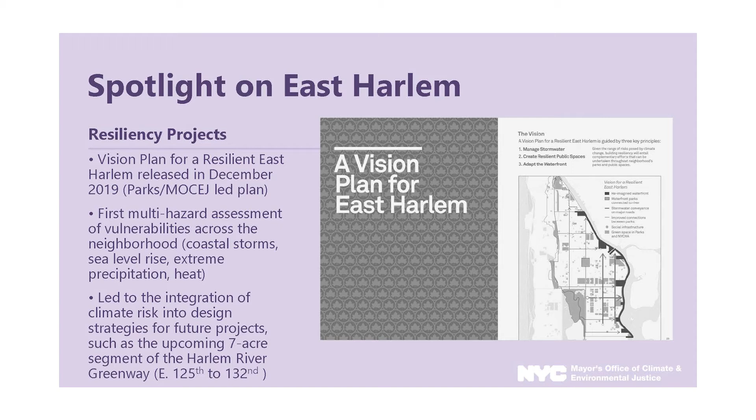This community very much dodged a bullet in terms of the worst impacts. But that said, if the storm had arrived slightly later, slightly earlier, it could have looked a little bit different. But it's not just coastal events like that. It's also heavy rain events like Ida that we all experienced very recently, and heat events.

And so we're very proud of the assessment that we did looking at multi-hazards across this community. And I think most importantly, it wasn't just a study that gathers dust somewhere, but it was immediately something that we were able to integrate into planning processes that you'll see through presentations that EDC and Parks will be giving later today.

Specifically the Harlem River Greenway and some of the upcoming projects. Another thing I wanted to highlight here, and once again we'll be going into a little bit more detail later, but a specific project that came out of that study was the cloudburst effort, relating to that Ida event, the kind of extreme rain that comes very quickly.

So one of the projects is at Clinton Houses. This is something that we were able to get a FEMA grant for during that study process. And back in the prior administration, we were able to get full funding for completion of an innovative pilot project at Clinton Houses looking at limiting the worst impacts of extreme rain.

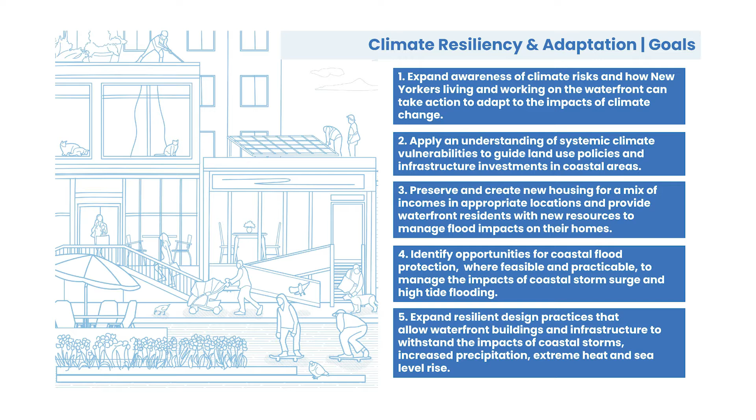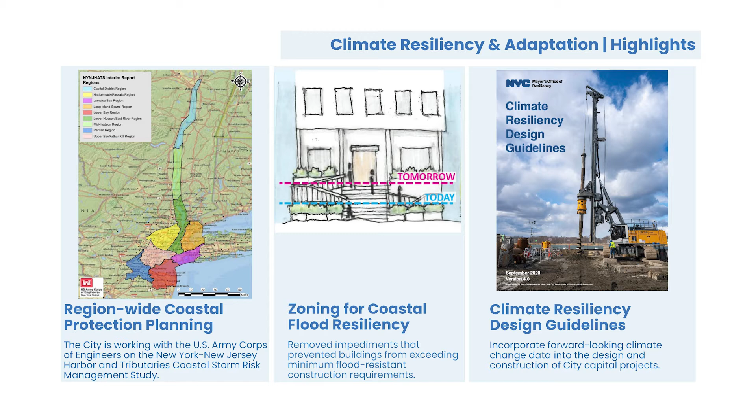Here are a few examples of how we'll do that. The city is working with the Army Corps of Engineers to advance the New York, New Jersey Harbor and Tributaries Coastal Storm Risk Management Study, which is looking at coastal protection for our entire region. The study restarted in November after a 20-month pause during which the previous federal administration declined to provide funding for this important work.

Since initiating the study, the Army Corps has identified 5 potential approaches based on elevation analyses, feasibility studies, and environmental assessments. These scenarios include a massive surge barrier between New Jersey and the Rockaway Peninsula, as well as smaller scale projects that the city has long advocated for. The Army Corps is expected to identify and conduct public outreach on one of these alternatives later this year.

In addition to advancing our coastal protection planning, the city has also taken steps to ensure that the design of buildings and infrastructure follows the best available climate science. Sandy reinforced that resilient building design can reduce our risk to severe flood events. Zoning for coastal flood resiliency, which was adopted by City Council in 2021, enables new and existing buildings to exceed minimum flood-resistant construction requirements. This will help ensure that the buildings we live in and work in can withstand flood hazards well into the future.

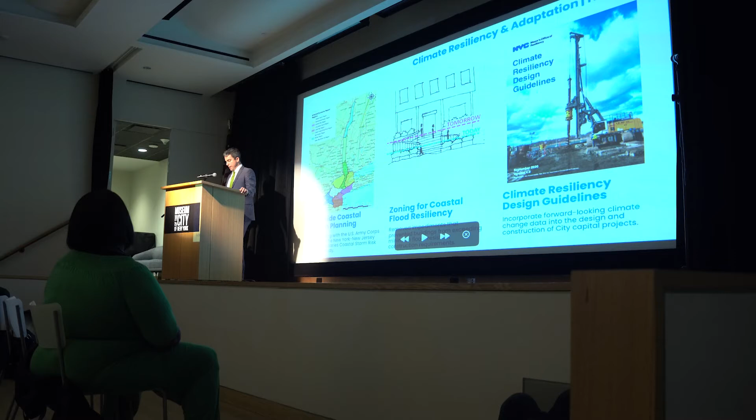Additionally, the design of the city's facilities and infrastructure will incorporate forward-looking climate change data through the Climate Resiliency Design Guidelines. These guidelines are being piloted on all types of city projects over the next few years to understand the design approaches that are most effective at managing coastal flooding, heavy rain, and high temperatures.

The next topic area is waterfront public access. The vision for waterfront public access aims to improve and expand access to open space by continuing to address inequities in access to open space and its design, acknowledging the vital role waterfront parkland plays in coastal adaptation, and redefining what waterfront access means by advancing opportunities for on-water recreation, such as kayaking.

The 4 goals for waterfront public access focus on bridging public access gaps in historically underserved and disconnected waterfront areas, promoting opportunities to get onto and into the water where appropriate, ensuring the design and programming of open spaces reflects a range of users, and promoting good stewardship of open space.

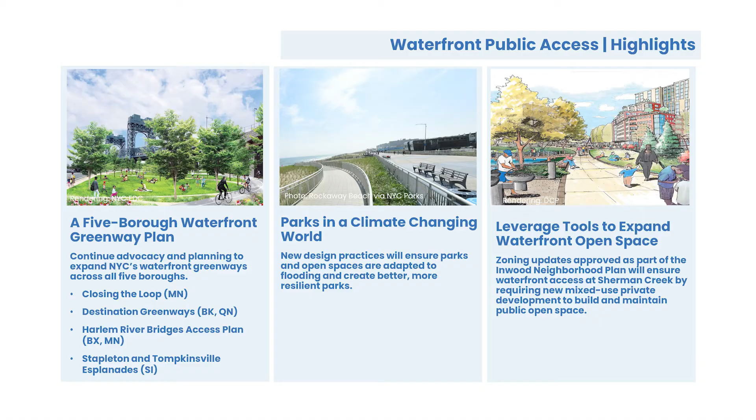Some of the projects and initiatives that would help achieve these goals include expanding New York City's waterfront greenways across all 5 boroughs, including completing the Manhattan Greenway in East Harlem, and improving conditions for pedestrians and cyclists across the Harlem River. We can also adapt design practices and the materials used to manage flooding, as well as to create better, more resilient parks, such as what the Parks Department was able to do in the reconstruction of the Rockaway Beach Boardwalk following Hurricane Sandy.

The plan also recognizes the importance of using all available tools to expand waterfront open space and improve its design. Zoning updates approved as part of the Inwood Neighborhood Plan, just to the north of Community District 11, will ensure waterfront public access at Sherman Creek by requiring new development on privately owned sites to build public open space. This will help create continuous public access along the Harlem River over time.

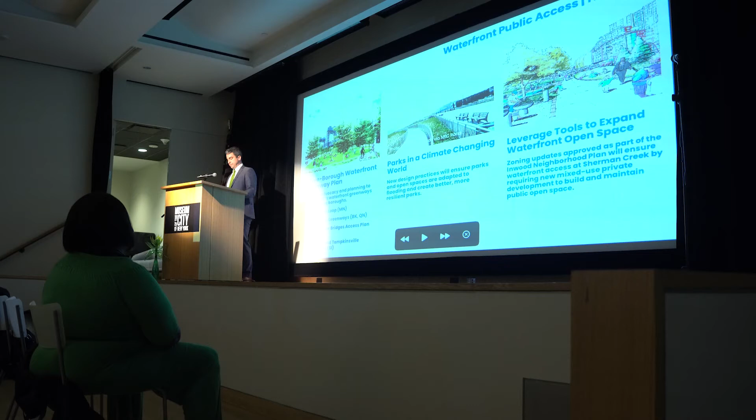The next topic area is economic opportunity. The vision for economic opportunity is to jumpstart the green economy to sustain and create a diverse mix of jobs for New Yorkers.

The goals for economic opportunity are advocating for a 21st century working waterfront, using the waterfront to diversify the city's economy and drive equitable economic recovery, connecting these investments to employment and career advancement opportunities, and promoting the use of our waterways for entertainment, hospitality, and education.

Under the Climate Leadership and Community Protection Act, New York State aims to reach 70% renewable energy by 2030 and reduce greenhouse gas emissions by 85% by 2050, putting us on the path towards carbon neutrality. This is a big deal for New York City because our expansive waterfront setting positions us to lead the way in offshore wind for the region.

The city is laying the groundwork to propel offshore wind in 3 core areas: sites and infrastructure, business and workforce development, and research and innovation.

The city will develop partnerships with communities to create well-paying jobs for disadvantaged neighborhoods historically affected by climate injustice. The plan further aims to support MWBEs and other local companies in accessing the over $70 billion in economic activity that is expected to be generated by the offshore wind industry.

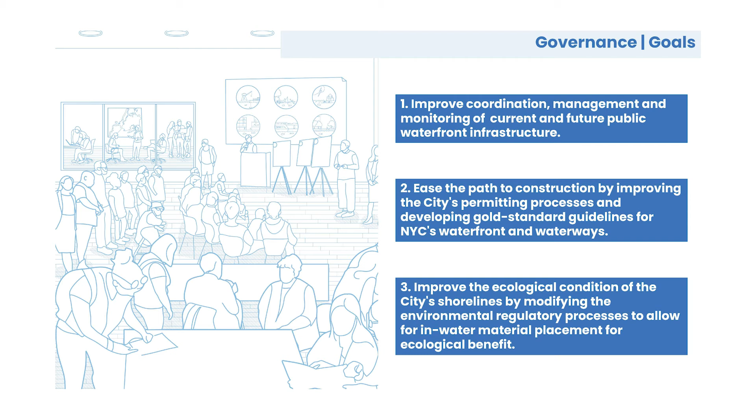The city is in the process of developing a new waterfront code to guide the design, permitting, construction, and maintenance of waterfront infrastructure. This code will ensure there is a clear and consistent set of standards for building things like piers, docks, and seawalls.

The plan also points to opportunities to promote living shorelines or other natural features along New York City's shoreline that require filling in a portion of a water body. Current regulations can encourage property owners to replace what's already at the shoreline rather than doing something more innovative. This means a property owner is more likely to replace a bulkhead that provides no ecological benefit than do something more beneficial for the environment if it takes longer to permit.

The Alley Creek project that I mentioned before was approved by the state, but it took several years to do so, and was only approved as a pilot. It includes detailed monitoring requirements to show how adding fill is improving the ecology of the site. But by collaborating with state and federal regulators on this important work, the city can encourage resiliency and promote living shorelines along New York City's mostly hardened edge.

I'll wrap up by talking about the next steps for the plan. The Waterfront team was incredibly excited to release the plan in December, but there's still much more work to do. We are now focusing our attention on promoting the plan by doing presentations just like this one and working within the Adams administration to advance the initiatives within the plan.

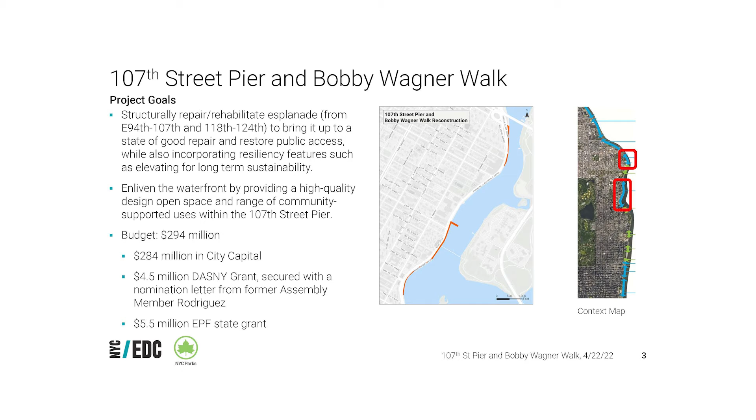The 107th Street Pier Bobby Wagner Walk project aims to structurally repair and rehabilitate the Esplanade from 94th Street to 107th Street and 118th to 124th Street, to bring it up to a state of good repair and restore public access, while also incorporating resiliency features such as elevating for long-term sustainability. Another portion of the project works to enliven the waterfront by providing a high-quality design open space with a range of community-supported uses at the 107th Street Pier.

This pier is planned to be completely demolished and rebuilt with new topside elements as a brand new open space. The pier is currently closed to the public, closed since 2018 due to structural safety concerns. The budget of the project is $294 million, with a large portion of that being city capital and a few state grants mixed in as well.

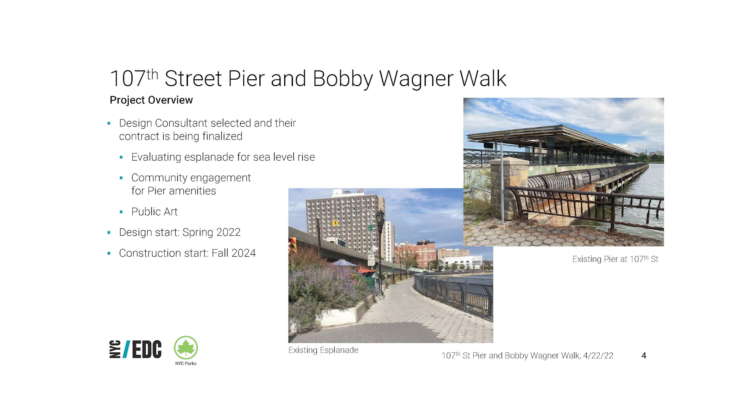We've currently selected our design consultant and we're working on finalizing their contract. The scope of the design includes building a strong, resilient Esplanade structure that absorbs the knowledge gathered from the East Harlem Resiliency study and applies it to the design in this location. There'll be modest elevation for sea level rise that will consider its impacts on inland drainage needs.

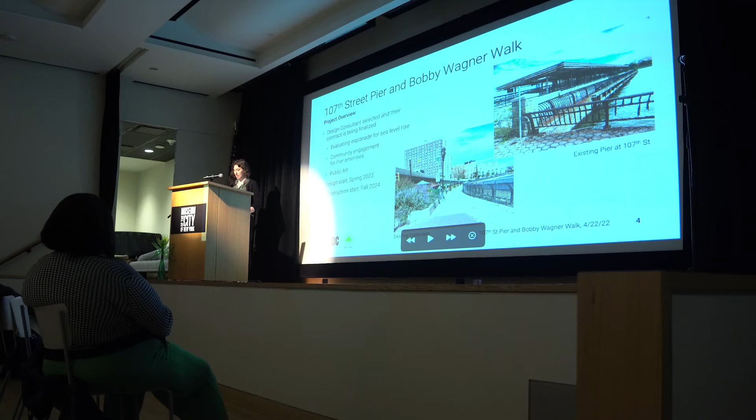The pier will also include public art, and the selection process for that artist will follow the Percent for Art process, similar to the process that was done on the Manhattan Greenway Harlem River just north of this. A selection committee will be comprised of community members, DCLA, Parks, and EDC, and an art consultant on the selected design team will do outreach to local and regional artists to determine who the call for proposals will go out to.

We are anticipating design for this project to start this spring in 2022 and construction to start in fall 2024.

Just north of 107th Street Pier, Bobby Wagner Walk, is an ongoing project, Manhattan Greenway, Harlem River. This project has been presented many times over the past few years to Community Board 11, and so today I'm just going to give a refresher on the project background and the overall scope and design of the project.

The Manhattan Greenway Harlem River is a project that's part of a larger greenway plan to close the loop around the island of Manhattan. The area between 125th Street and 132nd Street is one of the last remaining gaps in this loop. This project will provide greater access to the waterfront, safe pedestrian and bikeways, along with parks amenities.

Again, EDC is implementing this project on behalf of Parks as part of a larger project we are managing to restore structural integrity of the waterfront along almost the entirety of the east side of Manhattan along the Harlem River.

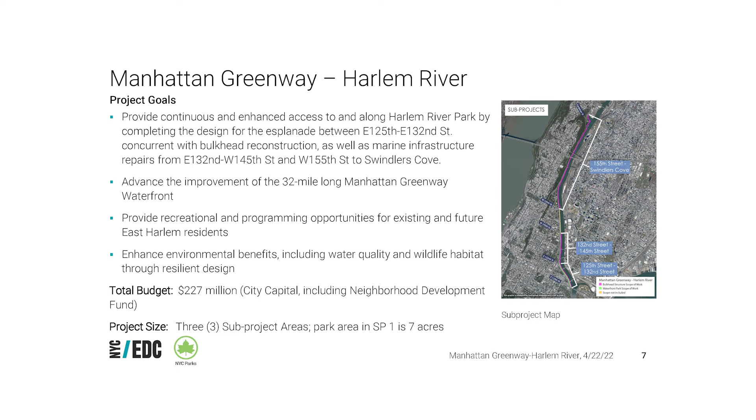You can see here we have in this map our three sub-projects identified. The southernmost is that 125th to 132nd Street area, and that's where this new 7-acre park will be located. Just north of that is sub-project 2, 132nd to 145th, where there's an existing esplanade where we'll be doing structural repairs. Similarly, from 155th to Swindler's Cove, there's an existing esplanade where we will be doing bulkhead and marine infrastructure repairs.

And the budget for this project is $227 million, funded by City Capital and including a neighborhood development fund. So today we're going to focus mostly on sub-project 1, the new park from 125th to 132nd Street.

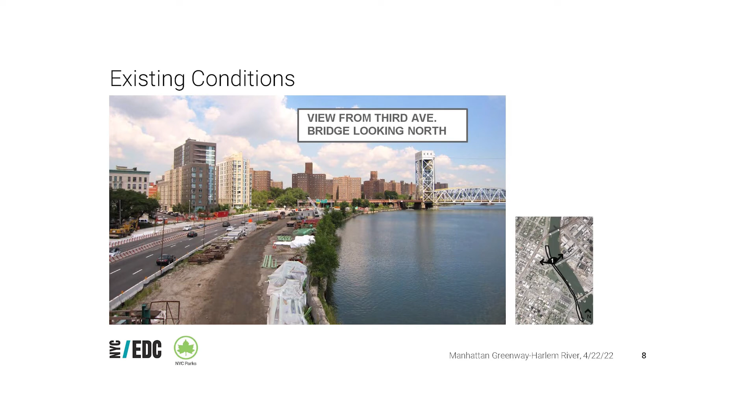Here's a view of the existing conditions on that site. You likely haven't been out here because it's been a construction staging area for City DOT and TBTA for many years. You can see it's just dirt and construction equipment. This is the view from 3rd Avenue Bridge looking north, and here is the view from underneath the RFK Triborough Bridge as it stands today.

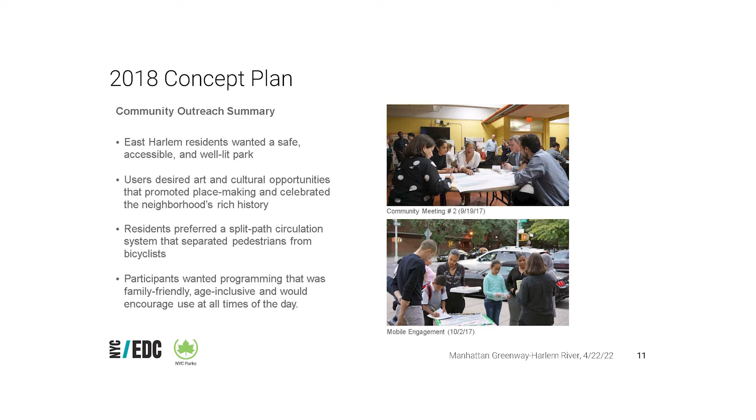This project developed from a 2018 concept plan that Parks developed, created with community input and outreach in East Harlem. Through that outreach, we heard residents wanted a safe, accessible, and well-lit park, with desired art and cultural opportunities. Popular active programming amenities included playgrounds, basketball courts, and outdoor fitness features, while desired passive recreation features included benches, game tables, and picnic areas. Shade and trees received the most votes in the vegetation category.

Moving forward into today, the 2020 design is now being managed by EDC. We have Langan Engineering as our lead engineer, with Starr Whitehouse Landscape Architects working with us to develop the design for this park. We're currently progressing final design detail drawings, so what you see today is how the design stands, but it is still in progress.

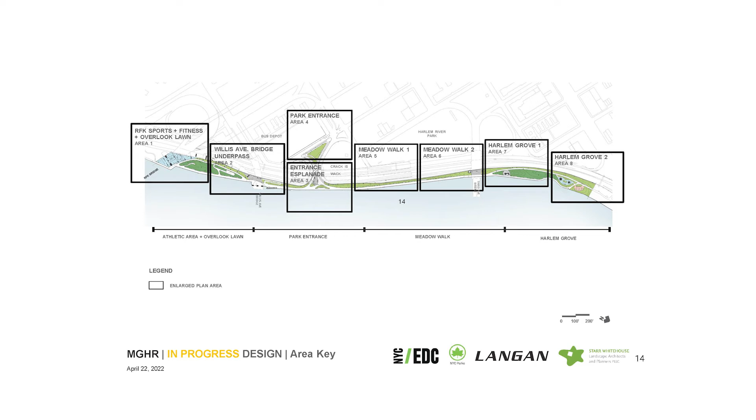Here's the overall view of the park, and we're going to go into each section to see what programmatic elements are there. This is a work in progress, and I'll give a plug for the Community Board's Open Spaces and Environment Committee - our Harlem River design team will be there on May 5th to give a more in-depth presentation and detail updates on how the design has changed since they last presented. The artist producing the public art piece for the park will also be there to present his updates.

Starting at the southern end at 125th Street, this is the area under the RFK Bridge that we saw in that existing conditions photo. Under the bridge, there'll be a variety of fitness equipment. We'll have basketball courts, exercise areas, a separated bike path along the back and the esplanade along the front, and a passive lawn area.

This project is working to raise the esplanade for sea level rise. The new esplanade elevation will be raised about 3 feet above the existing shoreline elevation, which is at about 7.5 feet, up to 10.5 feet to accommodate for sea level rise.

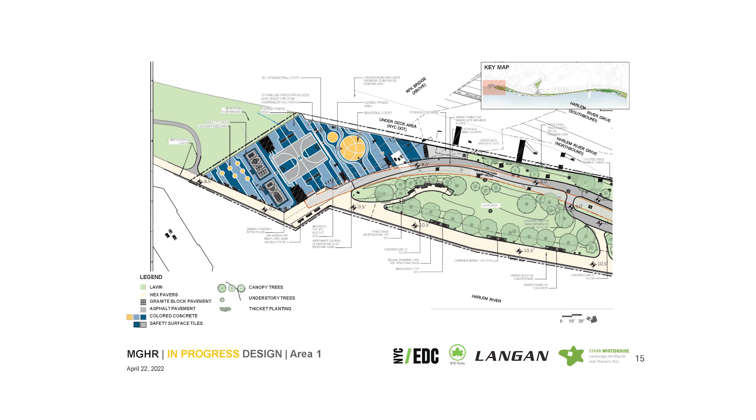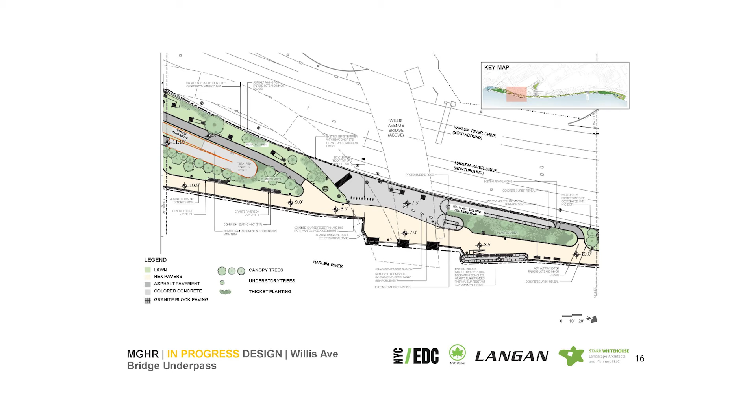Moving north from here, this portion of the Esplanade connects out to 127th Street, so this will be the main at-grade access point for the park. You can see plantings, and there are benches located here to passively take in views of the river.

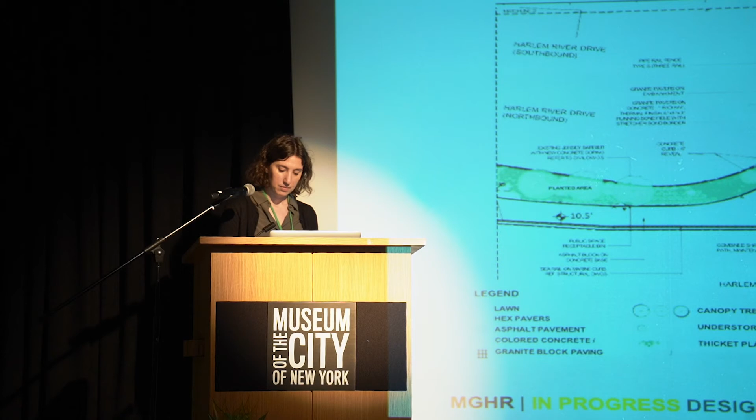Moving west, out towards 127th Street, this is an existing triangle that's going to be reworked as the entrance to the park. If you've been on this triangle before, there are no walkways - it's just planted. So in the development of this project, it will include bike and pathways that lead into the park, bike racks for people to park their bikes, and improved curbs and curb cuts for crossing.

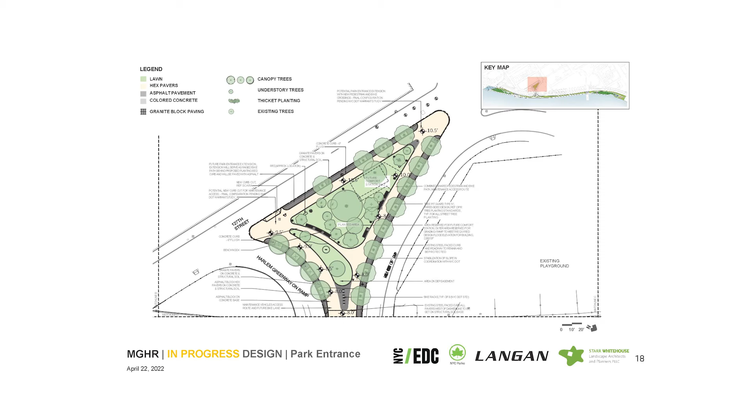We've heard from the community a large desire for a comfort station and bathroom in this park, so we're leaving a space in this entrance triangle to accommodate that in the future. The Parks Department is actively working to continue pursuing funding opportunities along with the community board and electeds to try and add a comfort station to this area of the park.

Back onto the Esplanade, moving north, this begins the Meadow Walk portion, a long, beautiful path with plantings, the raised esplanade, and passive benches. Part of the design here includes hundreds of new salt and wind-tolerant trees, shrubs, and native plants adapted to New York City's harsh shoreline conditions. We'll have hundreds of new plantings along this new Esplanade and Greenway.

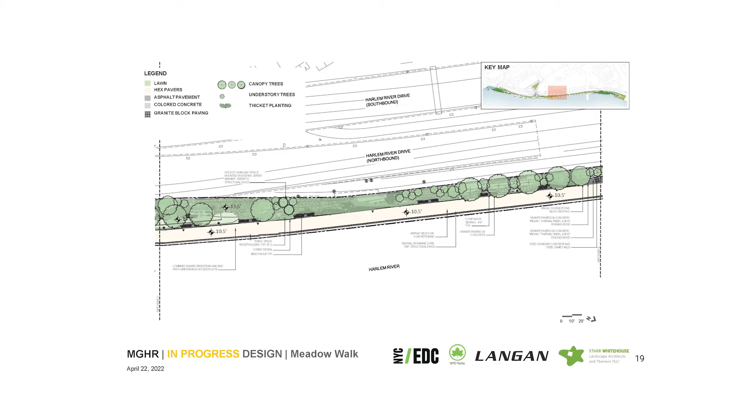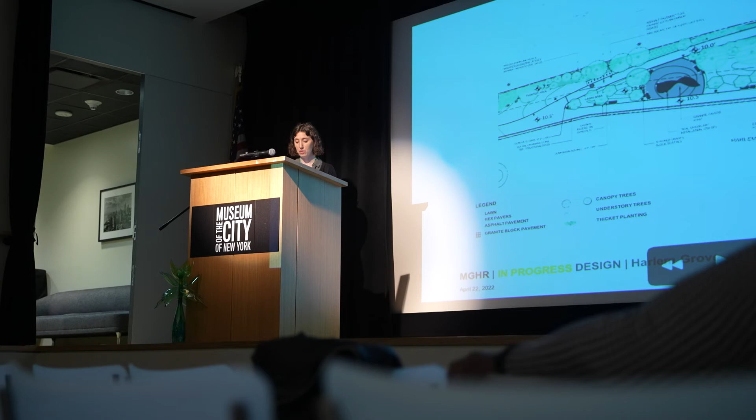The Meadow Walk continues north here with similar plantings and passive bench recreation areas. Just north of this is what we're calling the Harlem Grove area. Again, when the Esplanade gets wider, we have a separated bike path along the back of the site and the Esplanade along the water.

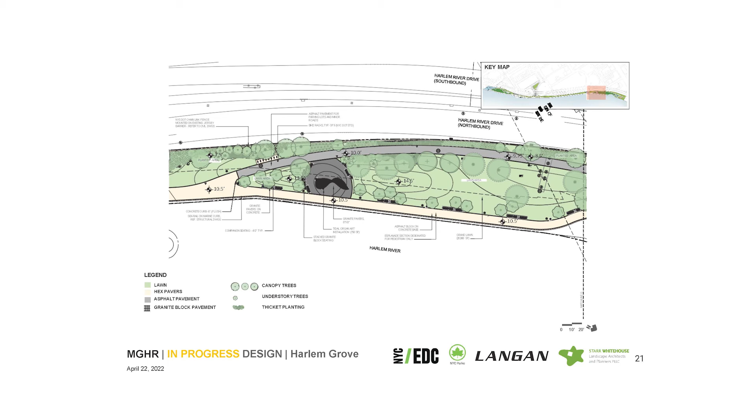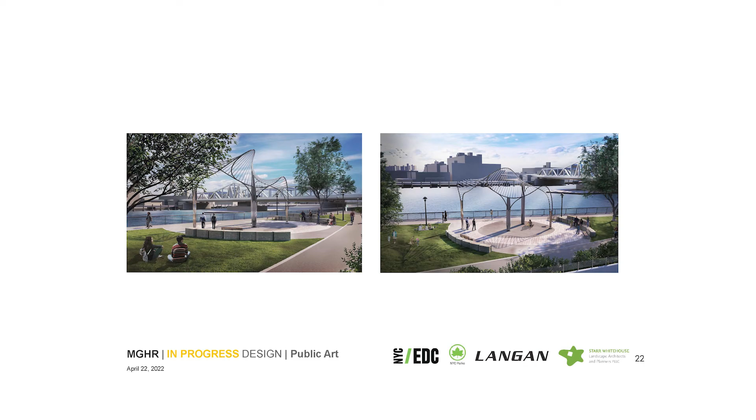We have a large passive lawn area here, and this is the site of a new public art piece as well. Here you can see some renderings of what that art piece will be. It's an original organ piece designed by Edo Adegibi.

The piece will both create a moment for observation as well as an interactive production of sound. At the very north end of the site at 132nd Street, we've maintained our separated bike path and pedestrian path and added a playground as well as a barbecue area, which has been expanded after community input. It's now 2,700 square feet and includes 6 barbecue grills. There's also a fish cleaning station.

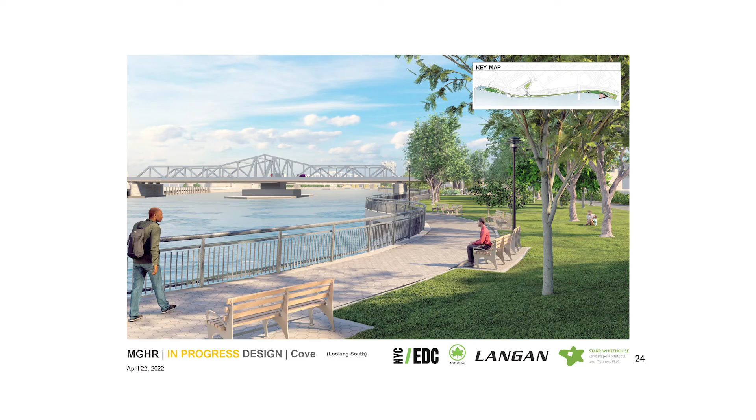We had a great design opportunity to incorporate this cove that you see on the left here. This creates additional open water and intertidal habitat as required by the New York State Department of Environmental Conservation. This added feature of the cove arose from a need to reach a net zero cut fill on the project in order to meet that New York State DEC mitigation requirement. So even for basic bulkhead reconstruction work where we're doing structural fill, we needed to get creative on finding solutions to meet the DEC requirements.

This presented a design opportunity to create a new moment within the park for expanded views of the water by creating this beautiful cove.

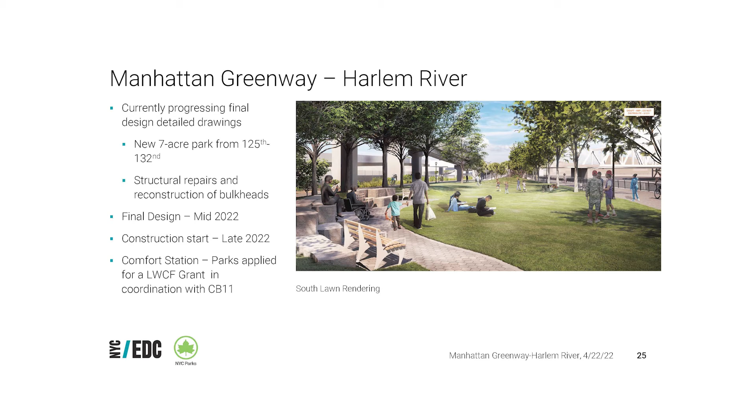In summary, for Manhattan Greenway Harlem River, we're currently progressing final detailed design drawings. There'll be a new 7-acre park from 125th to 132nd Street, and then north of that, from 132nd to 145th and 155th to Swindler's Cove, there'll be structural repairs and reconstruction of bulkheads, making them stronger and more resilient. We're expecting final design mid this year and construction to start in late 2022. Thank you.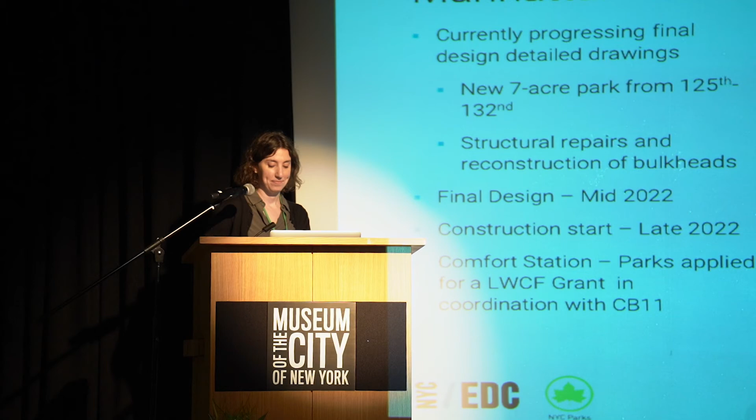Jessica's on her way.

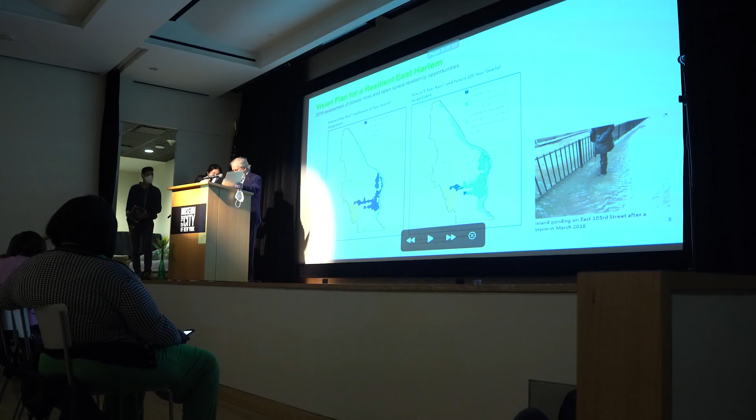Ricardo, Jana, could you come up? Are Ricardo and Jana here? Is Michelle Palmer here? Oh, that's it. Oh, great. All right, so maybe half of us are here. Two-thirds. All right, keep those fingers handy.

First of all, I want to back up the presentation just made by EDC. I don't know whether people understand how significant the addition will be, the capture that we're making of the waterfront property between 125th Street and 132nd Street, and the opportunity it provides us to expand parkland in East Harlem. It's a very significant addition to our portfolio, and the Parks Department is really looking forward to the opportunity to have what is going to be a magnificent park.

We're thankful to EDC for taking the reins and helping us with the construction, but it should be also clear that the Parks Department has been integrally involved in this process all along, and have also helped to shape the design, since we're going to have to maintain the property.

Over a period of time, we've added to our properties along the river in the Harlem River Park, a little bit further north between 132nd and 144th Street or so, in two phases. This is yet another phase in which we've expanded parkland right along the Harlem River, and this is one of the more significant additions we've had in a long time. So thank you to EDC, and thank you to CB11 for pushing us in that direction.

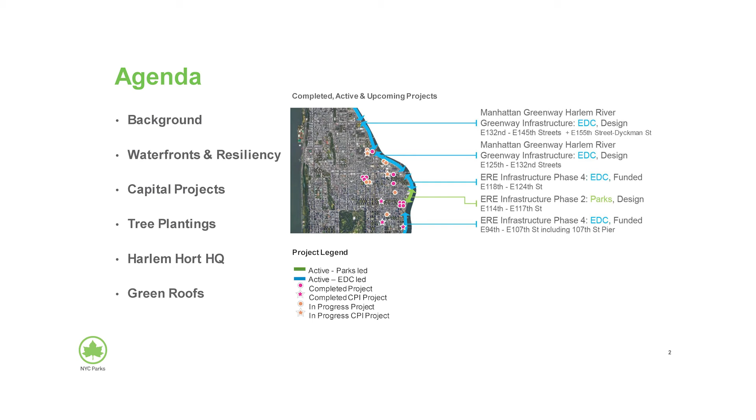Thank you, Steve. My name is Alda. I'm in the Planning Division of New York City Parks. I wanted to touch on what this diagram shows. We mapped out the upcoming and recently completed waterfront projects, shown as arrows along the waterfront, as well as recently completed and in-progress projects. The pink shows completed capital projects, the orange shows in-progress projects, and we've starred the Community Parks Initiative projects, which Steve mentioned are our centerpiece equity projects that Ricardo will go into a little more detail.

In the Planning Division, we do a lot of work thinking about the long-term future of our open spaces and parks. One of the things we think a lot about is climate change and resiliency. As my colleagues from the mayor's office and Jessica had mentioned previously, in 2019 we partnered with the mayor's office to do a vision plan for a resilient East Harlem.

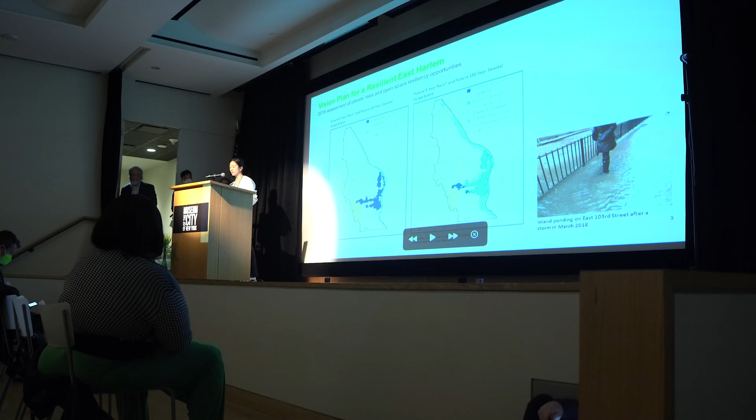Part of that vision plan process was looking at the future climate risks of the neighborhood. We mapped and analyzed what those future climate risks would look like within the neighborhood. As Jessica mentioned, what we saw was a lot of flood risk, both from coastal storms and sea level rise, as well as from rain events, water coming from the sky. A lot of that has to do with the nature of the waterways and wetlands that used to be in this neighborhood. That's something we took into account along with community input as we put together this vision plan.

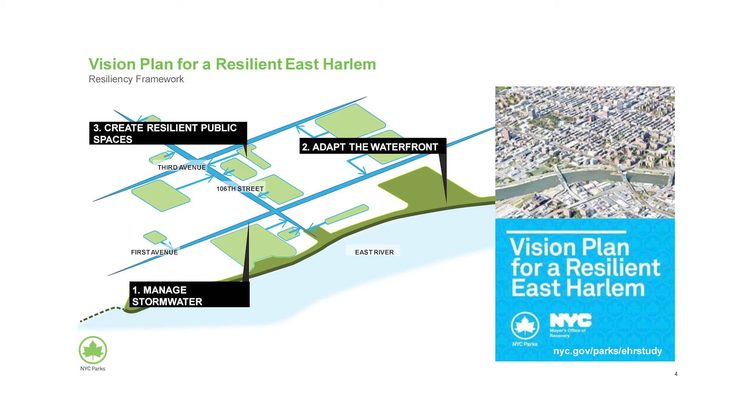The vision plan includes 3 main recommendations. The first is that we really need to manage the stormwater that will collect in the low-lying areas within the neighborhood. The second is that we really need to adapt and elevate the waterfront. And the third is that we need to be thinking about how to create resilient public spaces. As a Parks Department, we think a lot about how our playgrounds and parks can play this role.

If you want more information, we're not going to go through all of it today. You can check out the plan online. It's nyc.gov/parks/ehrstudy.

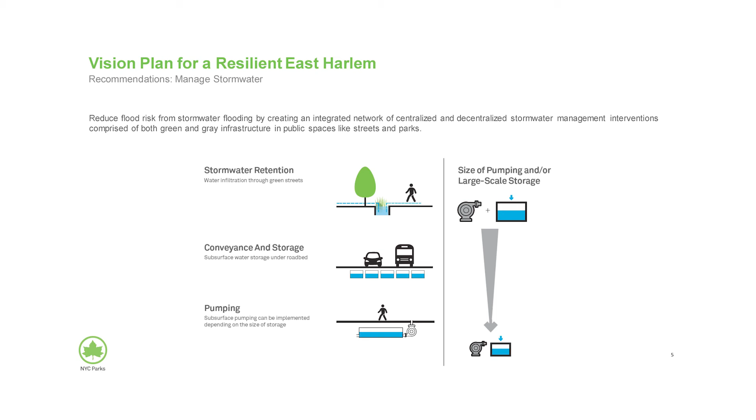Some of the things that came out of that plan and recommendation were, as we mentioned, the need to manage stormwater, really looking at a range of both green and gray infrastructure improvements in all types of sites, given the level of risks we're seeing in the future. Some of that is stormwater retention, some of that is larger conveyance and storage.

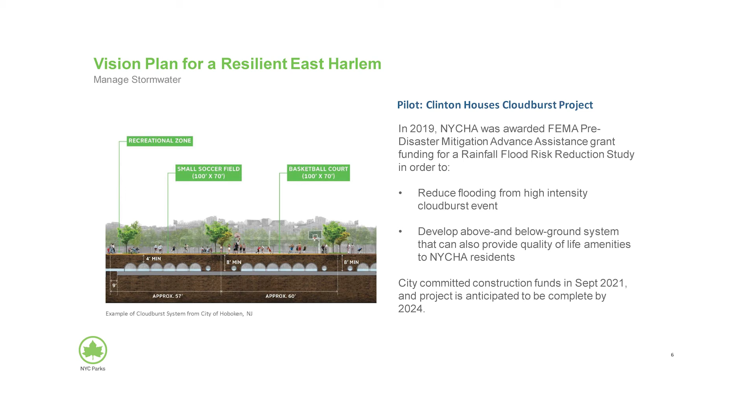As Jordan mentioned previously, one of the direct outcomes of this study is that the city was able to focus and seek funding to first study and now implement a cloudburst, or extreme rain, project within the NYCHA Clinton Houses. This isn't parkland, but I think this is something we're really looking forward to as something that could be potentially implemented in future parks.

It's also a moment to plug our Community Parks Initiative program, of which there are 3 completed sites in East Harlem and 2 that are currently in design. This is really a way in which we are transforming park spaces that may have a lot of blacktop, are not very absorbent to rain, and may be a little hotter because of materials, making sure that we partner with the Department of Environmental Protection to include rainwater absorption.

Playground 103, which Ricardo will show some more pictures of later, is one where we are able to capture 1.7 million gallons of stormwater. We're also using materials that make it a little cooler, making it a place where people of all ages can come and enjoy a cool spot in the summer and in all seasons.

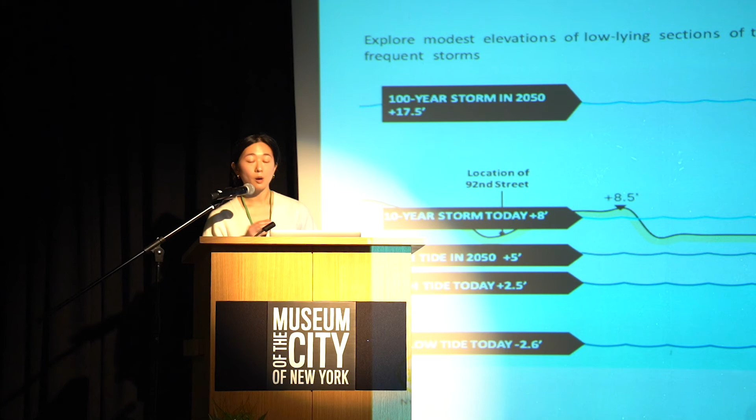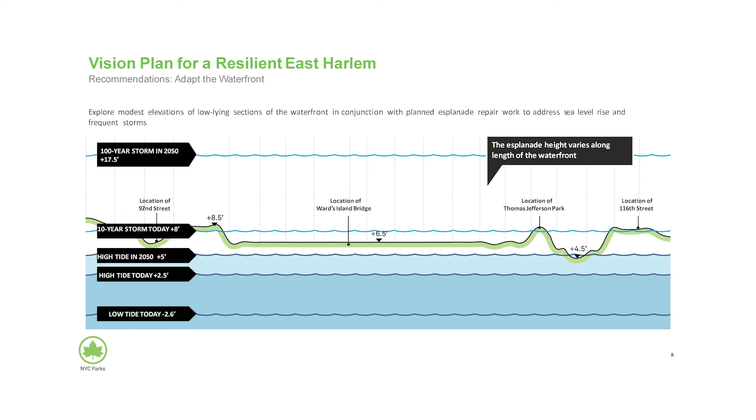From a waterfront perspective, the study also looked at the elevations of the waterfront esplanade, and one of the things we recommended was really looking at the waterfront elevations as we improve and restore our waterfront esplanades. This is something that's really informing how we're designing our future waterfront open spaces.

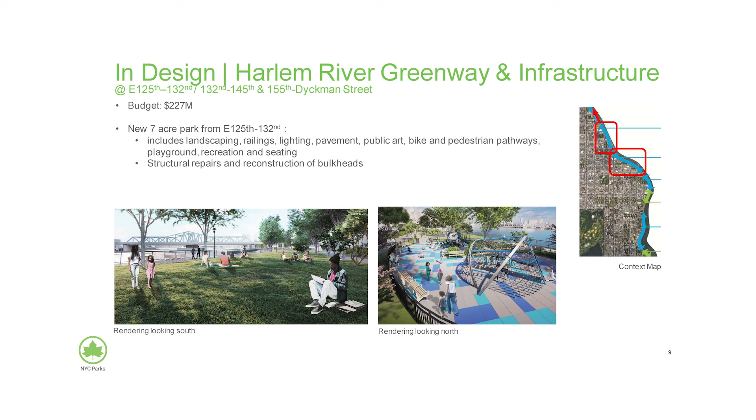So as Meredith talked about, the future Harlem River Greenway, particularly the segment between 125th to 132nd Street, which is that new 7-acre park, we are incorporating elevations there to accommodate sea level rise and future storms. It's also going to inform the 107th Street Pier and East River Esplanade Phase 4 project, which Meredith spoke about, but my colleague Mary here will also touch on briefly.

Hello everybody, I'm Mary Ely from Parks Planning. I'll be working on the reconstruction of Pier 107 Bobby Wagner Walk along with Meredith at EDC. As Meredith mentioned, the project includes a few components, including to repair and rehabilitate the East River Esplanade, incorporate long-term resiliency goals such as managing sea level rise, design and reconstruct Pier 107, and improve the waterfront with pier amenities and public art.

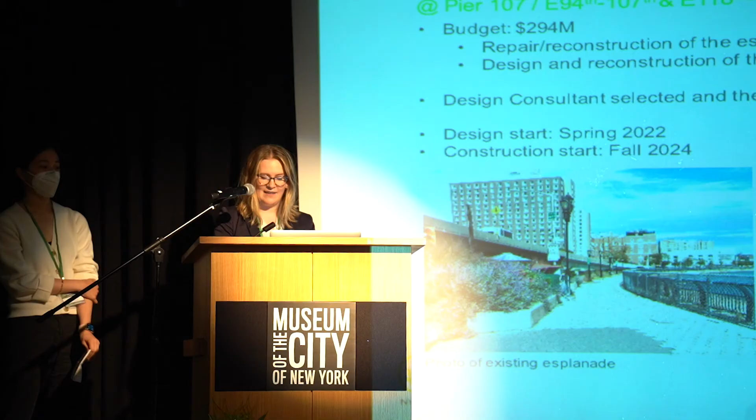The budget for this project is $294 million, and that includes some city money and state grant money as well. As for the timeline, design is expected to start this spring once a design consultant is finalized, and construction is expected to start in the fall of 2024. Passing it back to Alda, who will cover ERE phases 1 and 2.

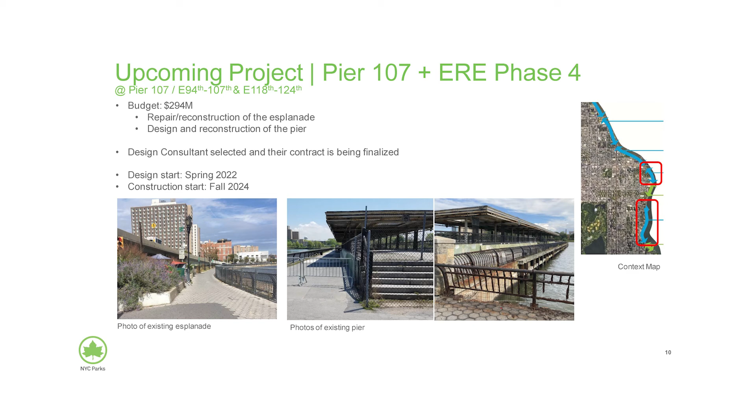Thank you. Great. So just wrapping up our waterfront updates, I think I would be remiss if I didn't mention the work that Parks is doing to rehabilitate the East River Esplanade and plan and build it for future risks.

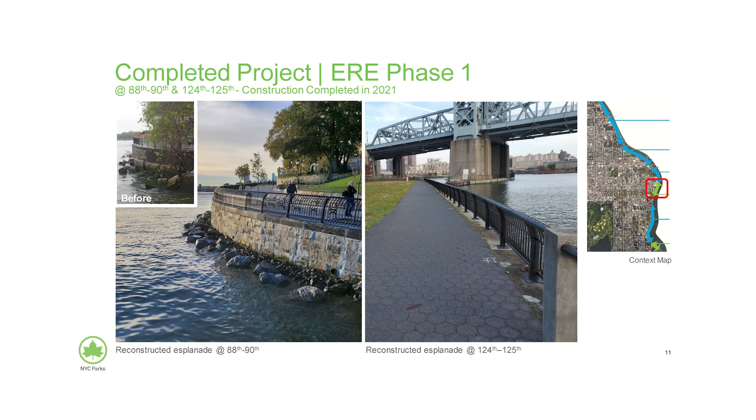So we have recently completed the first phase of the East River Esplanade. That was a segment from 88th to 90th Street and 124th to 125th Street. That was completed last year.

And we are also currently working on the permits for the second phase of the East River Esplanade. That's 114th Street to 117th Street. I think for folks who have been following this project, the update is that we've been waiting on permits from the Army Corps of Engineers for about a year now. So unfortunately, there have been delays, but we are looking forward to being able to implement this project once we get those permits in hand.

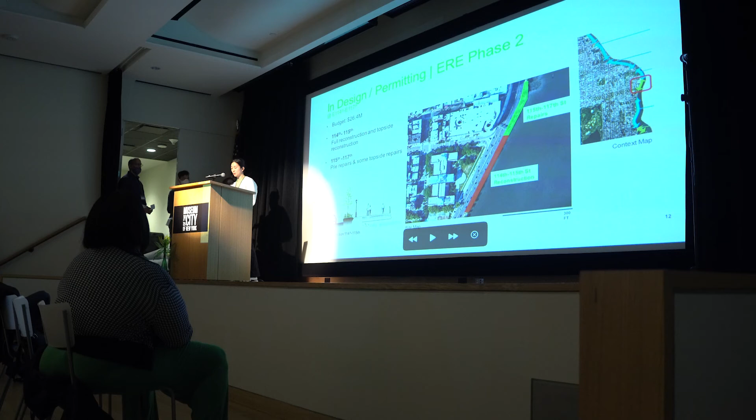It will reconstruct the waterfront, include more resilient materials, new seating, new plantings, and we're hoping that we get those permits soon. I'm going to pass this to Ricardo, who is our Deputy Director of Landscape Architecture or Design, to talk about our capital projects.

Thank you, Alda. Hi, good morning, everybody. My name is Ricardo Hinkle. I am Deputy Director of Landscape Architecture for the Manhattan team at Parks. I've been at Parks for 28 years. I'm going to describe 9 community board, 11 playgrounds, and the sustainability strategies that we have used. We can start, hold on.

Some of our most basic strategies that are repeated in all of our projects include heat mitigation, which can mean anything from planting more trees or preserving existing trees, because there's nothing better to cut the heat than a good shade tree. And what we call light-colored, high albedo pavements. Lighter-colored pavements, it turns out, reflect more sun and don't absorb the heat as much, so they tend to be cooler.

We also manage stormwater in our parks, and stormwater management usually means retaining water or detaining water on site, either in a vault underneath a play area or in plant beds or rain gardens. By cutting down on the amount of stormwater that actually goes into the storm sewer system, we cut down on the amount of pollution that goes into the rivers, because during heavy rain events, if stormwater replaces sanitary water going into the rivers and estuaries, that causes a lot of water pollution.

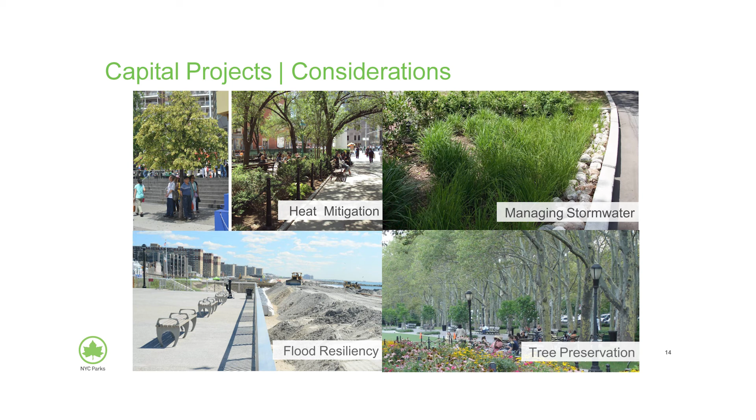We also are protecting our shorelines from sea level rise and also from wave action. And again, tree preservation. I call tree preservation sort of the Holy Trinity of sustainability and resilience, because you get the heat mitigation, you cut down on the heat, you have a lot of stormwater percolation, a lot of stormwater storage, and it absorbs carbon. So that's why we call it the Holy Trinity. It does a lot of work for us.

I just made the Holy Trinity thing up, but as a rhetorical device. The first playground we're going to visit is James Weldon Johnson.

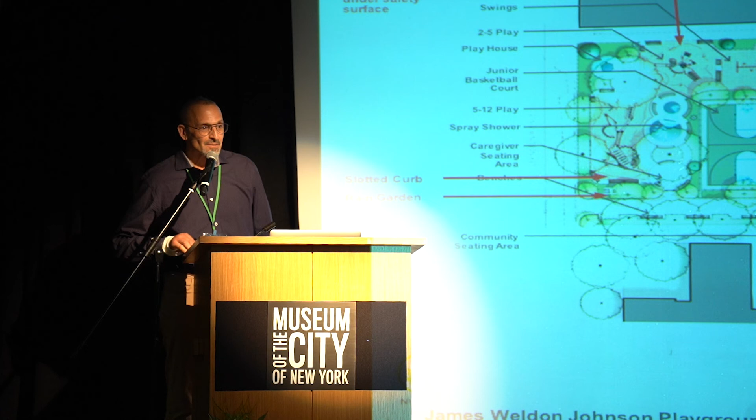It's around 114th and 115th Street on Lexington Avenue. One of the major sustainability features was a stormwater retention system under the basketball court, shown as that big orange square on the right side of the playground.

Other sustainability features include porous asphalt - asphalt with enough pores that stormwater can percolate like a sponge, and it's very effective. We're doing that under all of the safety surface and all of the play areas.

In addition, we're doing regular rain gardens. There's a difference between a plant bed and a rain garden - a rain garden is usually depressed so the water can collect, giving us more runoff retention.

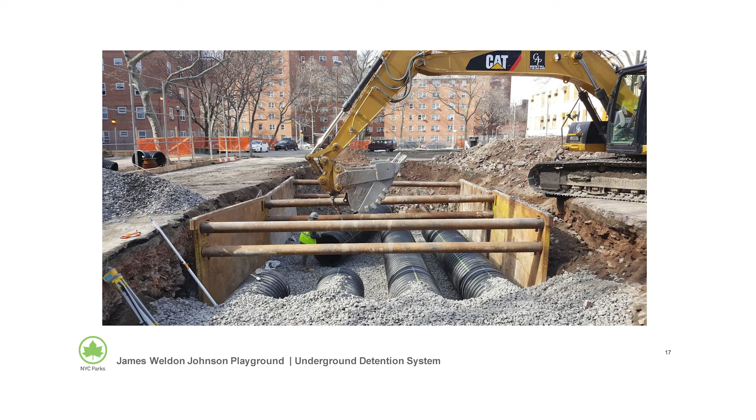Our second project is Abraham Lincoln Playground, at the corner of 135th and 5th Avenue. It recently was completed - we had a ribbon cutting, I think last October, and it's been very popular.

Some of the sustainability site work features include, again, the protection of existing shade trees, since there are a lot of shade trees on this site. We used light-colored pavements in the plaza areas with high albedo that reflects the sun.

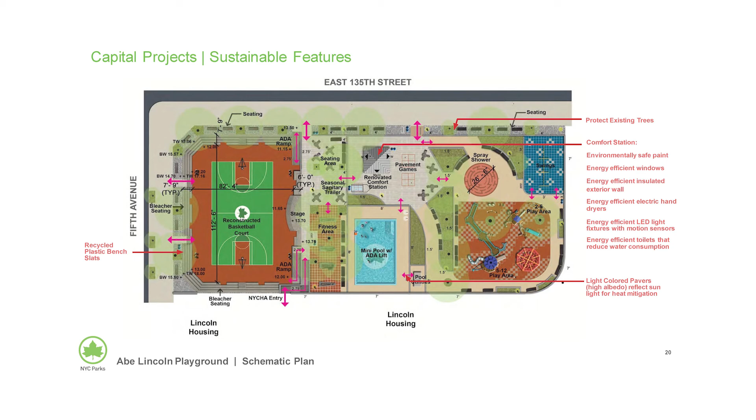In the building, there's a comfort station with insulated walls, insulated windows, low energy use dryers, and low water and energy use toilets and sinks.

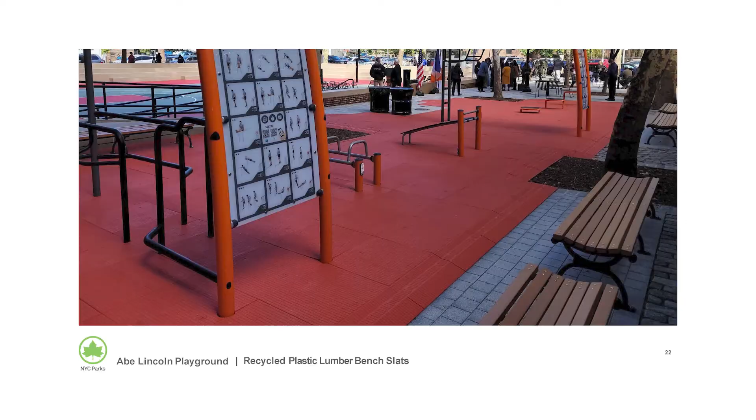This picture shows that in a lot of our park benches, we've stopped using wood and we're now using recycled plastic lumber. It's not only more durable, but it's a reclaiming use of recycled plastic.

The next playground is Playground 103, around 103rd Street and the FDR. One of its features is that it's a very low-lying playground, and during Hurricane Sandy it was inundated with several feet of water.

So one of the things we proposed was to create a lot of percolation space for the water. It was a very heavily paved playground, and we've made a lot of plant beds, rain gardens, and the like to help store water during heavy storm events. There were also a lot of trees that we protected.

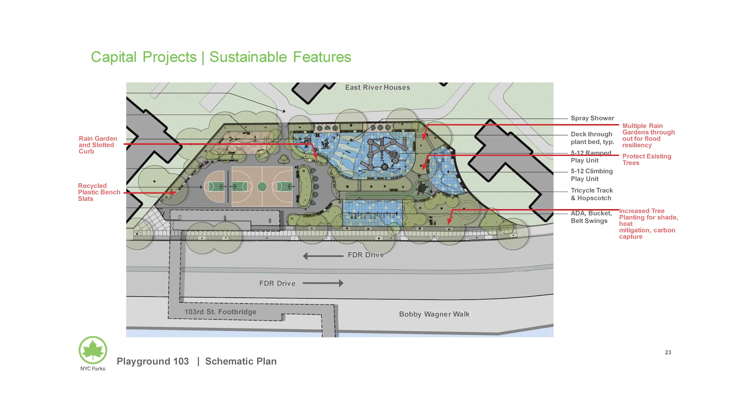Here's a picture of the park, and another picture of the park. Here's a picture showing a lot of the extensive planting we included to make it greener and to percolate the stormwater more effectively.

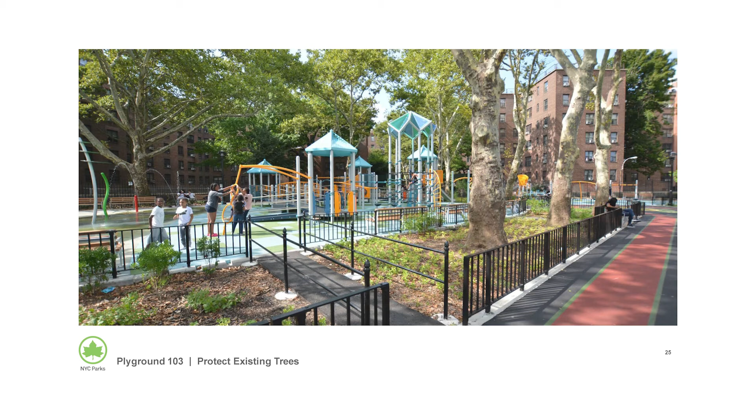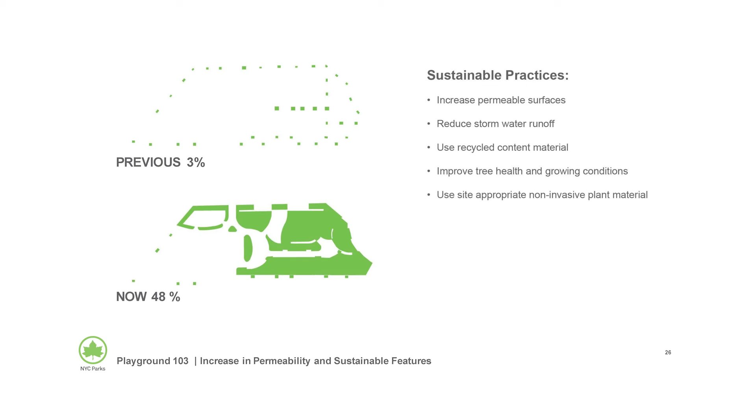This shows that it used to be only 3% permeable, which is very low, and we bumped it up - now it's 48%, which is a huge jump. That's a 16-fold increase.

Here's a picture of a rain garden, and the next park is White Park, located between 105th and 106th Street, between Lexington and 3rd Avenue, I believe.

The resiliency features at White Park include preservation of the large existing trees - you can see there are a lot of large trees - planting of new trees as well, and the use of light-colored pavements that are cooler than darker colors.

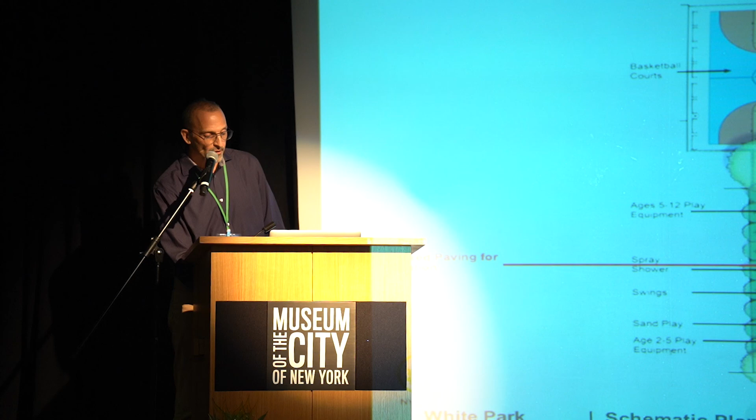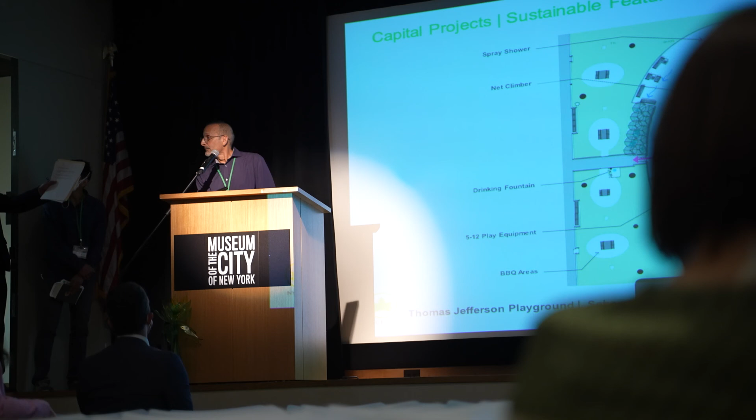The next park is Thomas Jefferson Playground, which is within the bigger Thomas Jefferson Park along 1st Avenue, just south of 114th Street.

The sustainability features here are the preservation of existing trees and the incorporation of 3 rain gardens, including one in the middle of the oval. The oval shape was actually inspired by the location of the trees so that we would avoid impacting them as best as possible.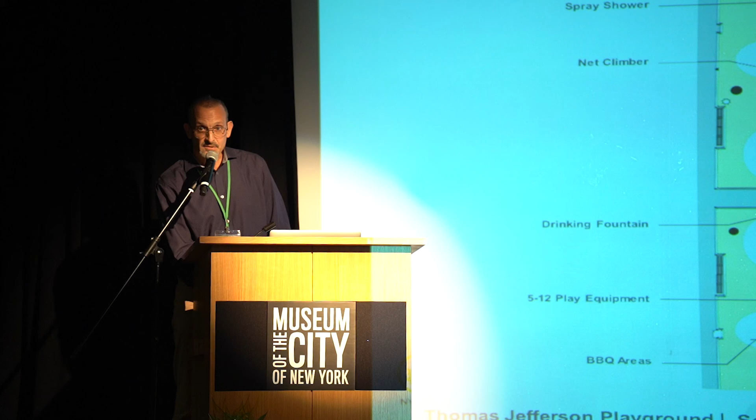Here's a picture of Thomas Jefferson Playground. The landscape architect wanted to use colors that would evoke the London plane trees in the spring, so there's the light-colored arch structures that were supposed to look like the lighter color of the London plane tree bark, which is very distinctive.

And then this is another project, Randall's Island. The Randall's Island living shoreline was built for flood resilience, sea level rise, and phytoremediation to clean contaminated soil.

I think you heard a little bit about phytoremediation. That's when the plant processes the heavy metals and other contaminants in the soil and brings it into the plant material, but takes it out of the soil. So you have to dispose of the plant, but your soil has cleaned. That's one strategy for cleaning contaminated sites.

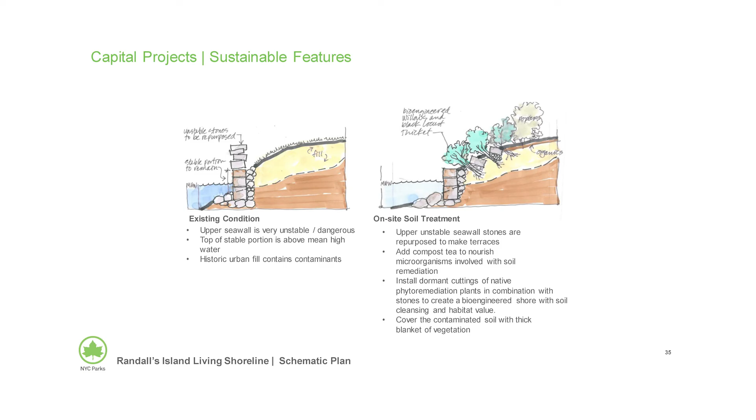At Randall's Island, we took an existing shoreline and cut it down a little bit, and made it a little more natural, a little more eco-friendly. These are fascines, or cuttings of native plants like willow, that are put in the soil, and then they tend to thrive and hold the soil in place, creating an erosion and wave-resistant shoreline edge—not for heavy waves, but light waves.

The coastal edge would be planted with native shrubs that would have the opportunity to adjust and migrate as the sea level rose.

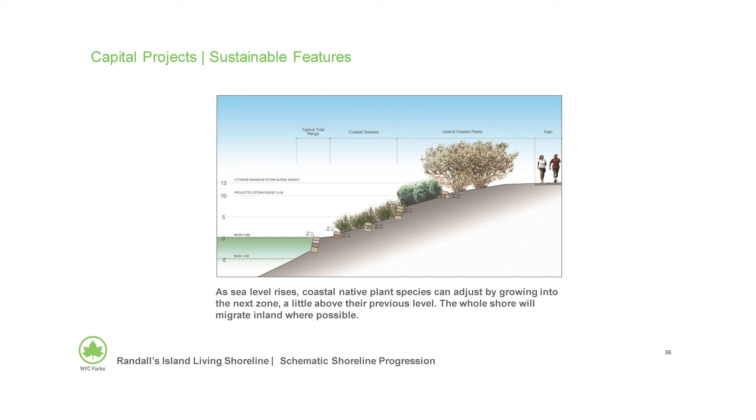This is Poor Richard's Playground, at 3rd Avenue and 108th Street. This is another playground where there are a lot of existing trees, and we've done everything we can to preserve the trees and keep them healthy.

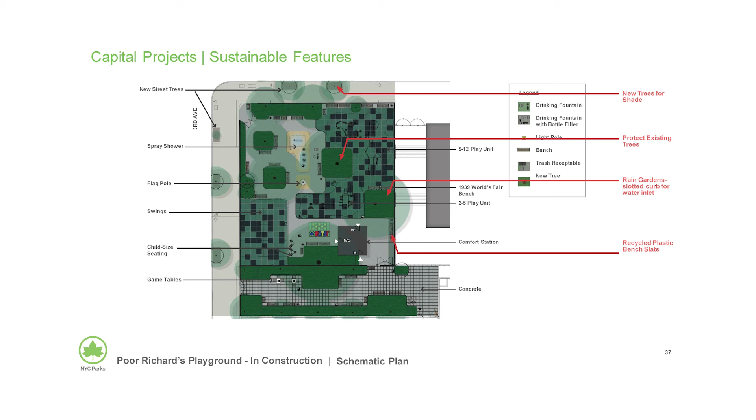One of the things we do a lot at Parks, and we've really perfected, is tree planting and protection strategies that make sure our large trees don't die a few years after construction. We've found that if there's too much impact too close to the critical roots, trees might not die the first year, but in a few years they'll start to flag. So we're trying to keep those trees as long as possible.

There's also rain gardens at Poor Richard's Playground. This is PS 155 Playground, another project with rain gardens, tree protection, and more tree plantings.

Yes, this is actually in procurement, not even under construction yet. It's at 118th Street between 1st and 2nd Avenues.

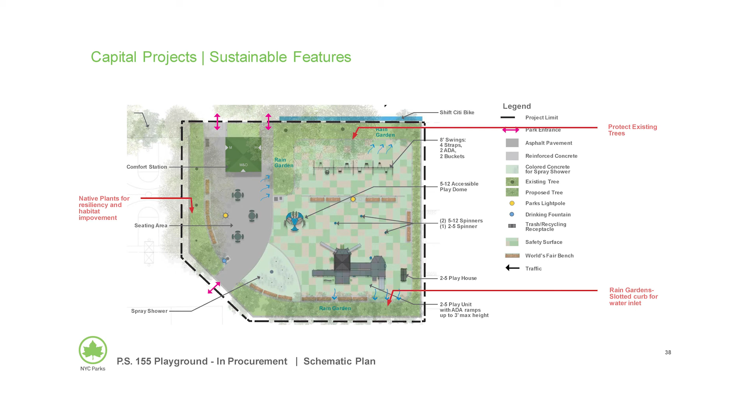One feature of PS 155 Playground is that this is another example where we took a site that was only 2% permeable and brought it up to 16% permeable. It's not like the other one that was 48%, but it's an 8-fold jump, which is very good.

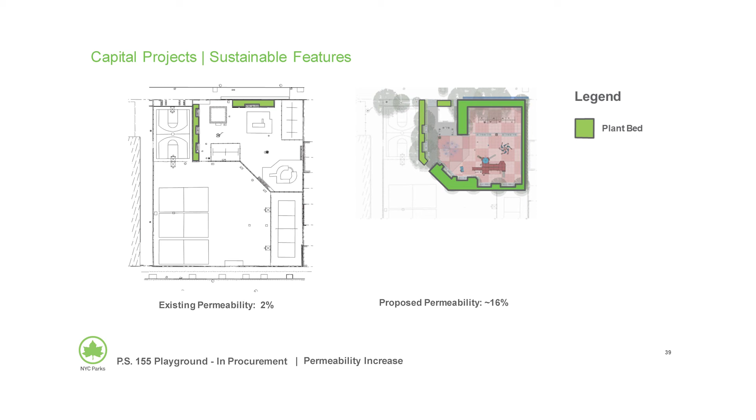And then the last and final site is Detective Omar Edwards Park at 124th between 2nd and 3rd Avenues. This is still in design, so there's not much that has been finalized.

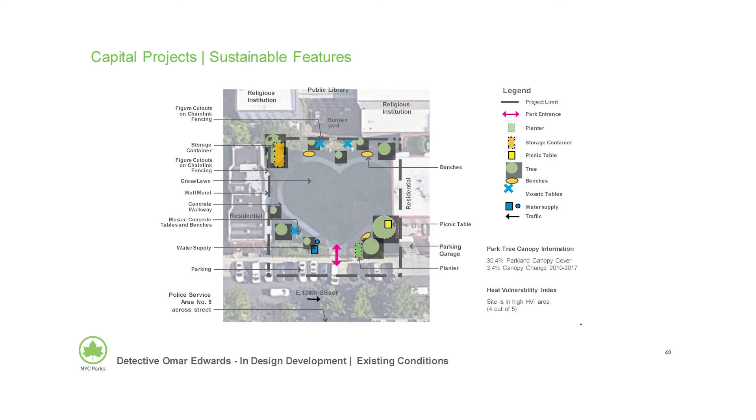Let me just say that, and I think you've just seen proof of it, Ricardo and his colleagues in our Capital Division have done an amazing job with their designs for upgrading these playgrounds, even setting aside all of the environmental benefits. The more interesting and challenging play equipment and designs that they have come up with for the children of this community, I think, are just amazing. They've done a very good job.

Let me also point out one other feature of the design process that we follow in the Parks Department, and we take great pride in this: we show respect to the community by starting the design process with what we call a community input meeting. We solicit the ideas of the people and local residents who utilize those parks and playgrounds before we even start any work at all.

We try to incorporate as many of the ideas that people suggest to us, because we want to make sure that the ultimate result of the design and the new renovated park and playground is something that the people in the community want and will actually enjoy. So this is something at Parks we are especially proud of, that we've built right into our design process.

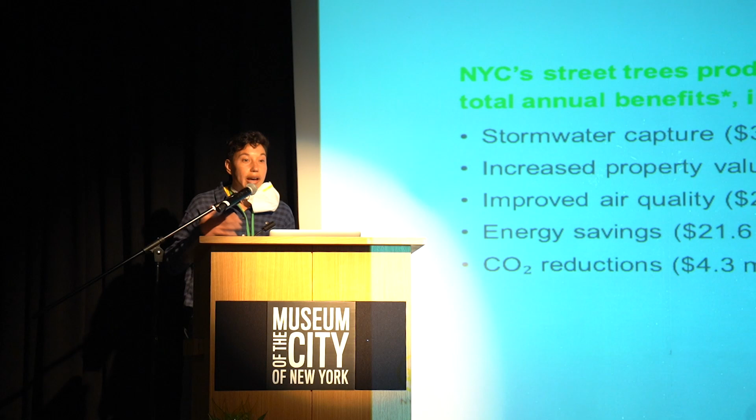First of all, trees are one of the simplest strategies we can employ to improve our resiliency and quality of life as New Yorkers. Trees increase in value over time. A small street tree planted today will only increase in value as it gets larger, providing more and more services to the community.

And this is a basic right that all New Yorkers deserve, now more than ever. So this is why, for the past decade, we've shifted our priorities looking at street tree planting through an equity lens. We're looking at those neighborhoods in New York where they're most needed, East Harlem being at the top of that list.

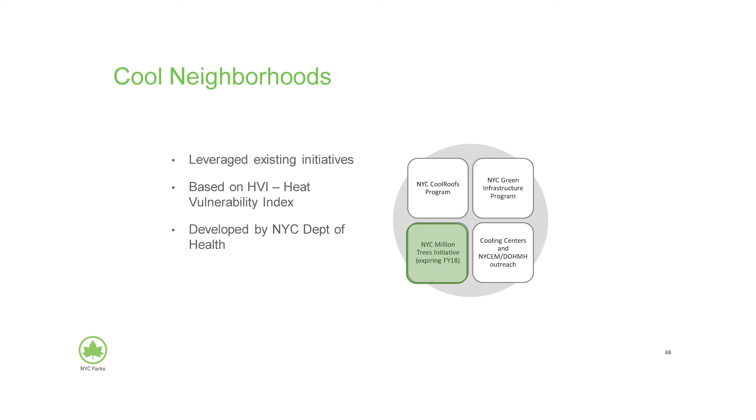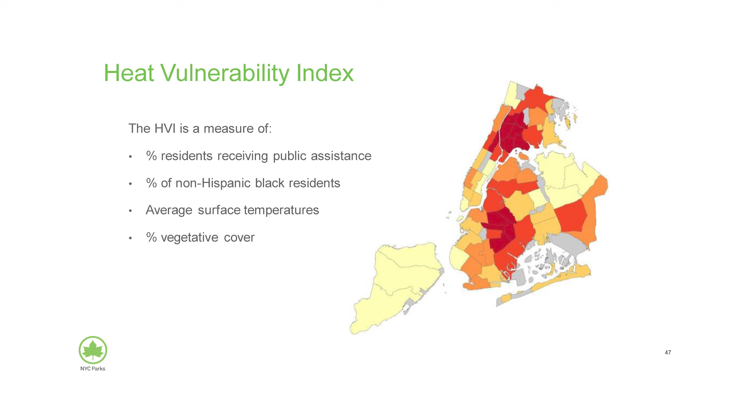We've been working with the Department of Public Health and the Mayor's Office to do this, starting with the Million Trees New York initiative and Cool Neighborhoods, which is what we use today. We look at the heat vulnerability index and that data through the lens of racial, economic, and environmental justice to choose where our funding is going and where those trees are being planted.

As a result, over 1,000 trees have been planted in Community Board 11, with more to come.

But planting trees is nothing if they don't last and live into maturity, right? So this is where you come in.

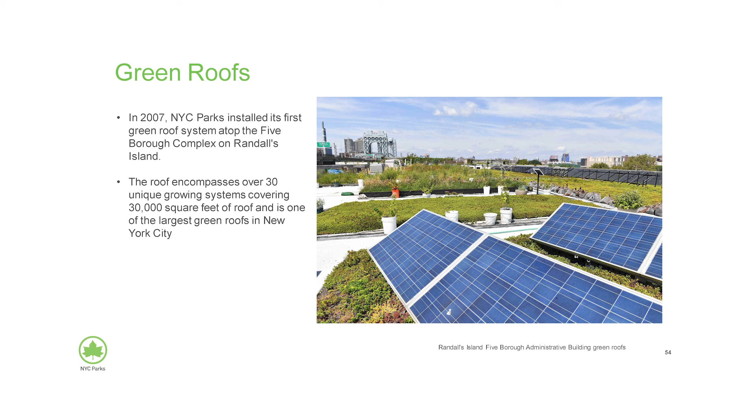We started this program in the CB11 area back in 2007. We installed our first green roof atop what we called back then the 5-borough complex on Randall's Island. This roof encompasses over 30 unique growing systems covering 30,000 square feet of roof and is one of the largest green roofs in New York City.

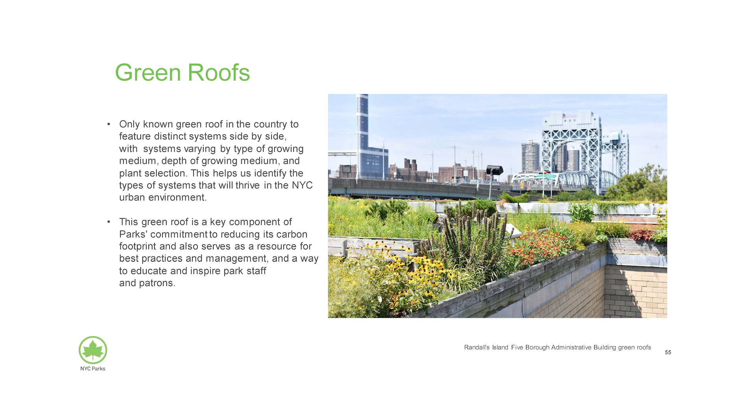This is the only known green roof in the country to feature distinct systems side by side, varying by type of growing medium, depth of growing medium, and plant selection. This helps us identify the types of systems that will thrive in the New York City urban environment. This green roof is a key component of Parks' commitment to reducing its carbon footprint, and also serves as a resource for best practices and management, and a way to educate and inspire Park staff and patrons.

So we did not stop at this green roof. We have since created 32 other green roofs on our properties throughout the city over the last 15 years, and we will be adding more green roofs, 50,000 square feet, for a total of 250,000 square feet in the near future.

One of the roofs we will be adding will also be in East Harlem at the Thomas Jefferson Recreation Center. We expect to have that done within the next 5 years.

So every inch of rain produces 26,250 gallons, so I'm told. And this particular roof on Randall's Island, we estimate has been capturing approximately 1.3 million gallons of rain per year, diverting all of that storm water from the New York City sewer system. So we have been saving millions of gallons annually through our Green Roofs program. I think we have every reason to be proud of it.

So, Jessica, I hope we've done a good enough job so that you will invite us back next year.